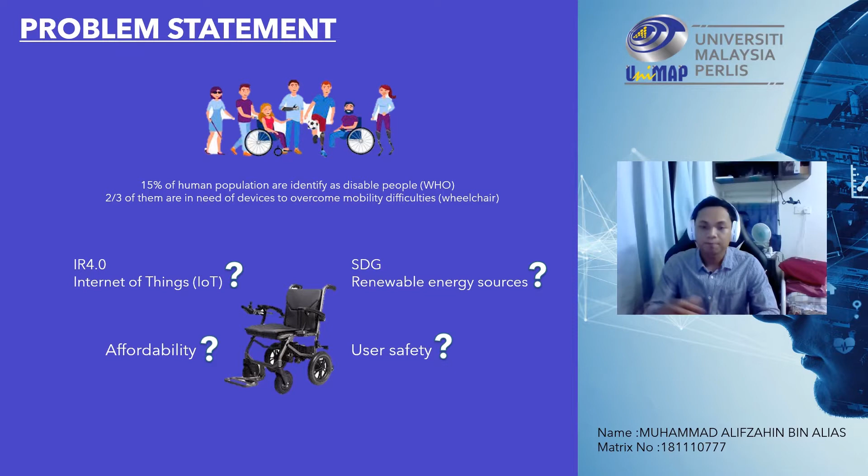We have 4 main objectives in this project. Number 1, to design a new contemporary generation wheelchair in accordance with IR 4.0. Second, to incorporate IoT, Internet of Things components into the wheelchair. Third, to innovate a wheelchair where minimal human effort is needed to move the wheelchair. And last but not least, to infuse renewable energy sources into the wheelchair as a part of sustainable development goals.

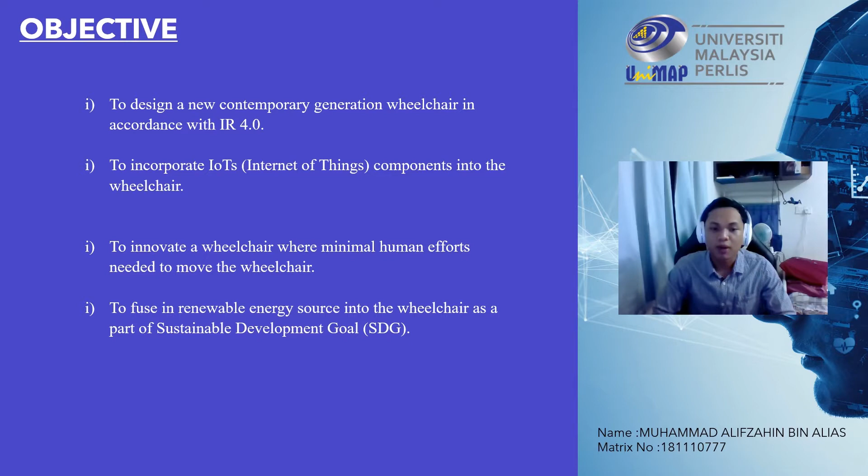Application. We have two sections of this chapter. Firstly, it's design of market survey, and secondly is survey analysis. For the design of market survey, we can conclude 4 steps to get information about the survey. We also ask some determining questions in the front part, about whether you are a person with disability, and if yes, the section will continue to the following part.

Secondly, we ask questions to collect some general basic data regarding the person with disability, such as the equipment they use the most during daily life, and how much time they use the equipment. For the third section, we ask about the problems they face regarding the equipment they use, and problems during usage. The scale is the psychometric scale, where the surveys typically use questions based on this scale. Lastly, the section highlights product opinions and requirements, such as affordability and clean engineering regarding the SDG.

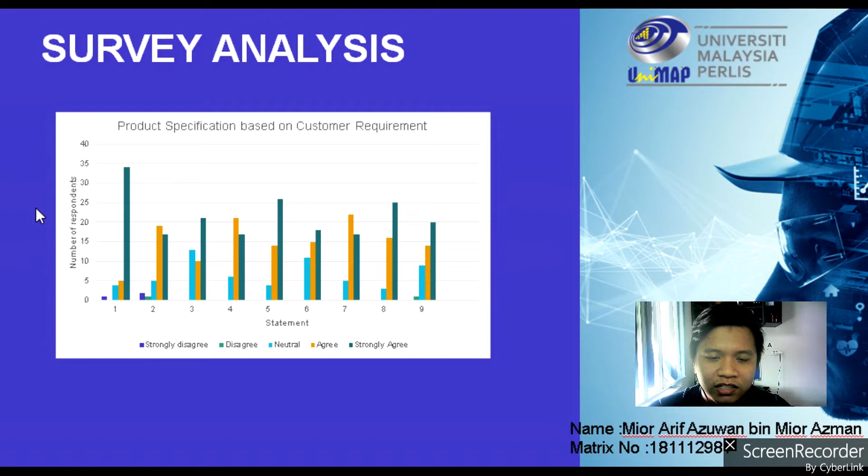For the survey analysis, we can summarize that most respondents want the smart electric wheelchair system which is able to detect any accident occurring and send out an emergency alert to the mobile application. For more information about this survey, you can refer to the report.

Dear panels, I'm Manoj Kiren Anak Lelaki Karthikeyan from RK08 course, and now I'll be talking about the design specification of our wheelchair. First, our wheelchair has an accident detector feature, followed by an emergency button feature. Other than that, our wheelchair is also lightweight and has a high weight capacity. For your information, our wheelchair uses minimum power to move around, and it's also water and dust resistant, which extends the lifespan of the wheelchair.

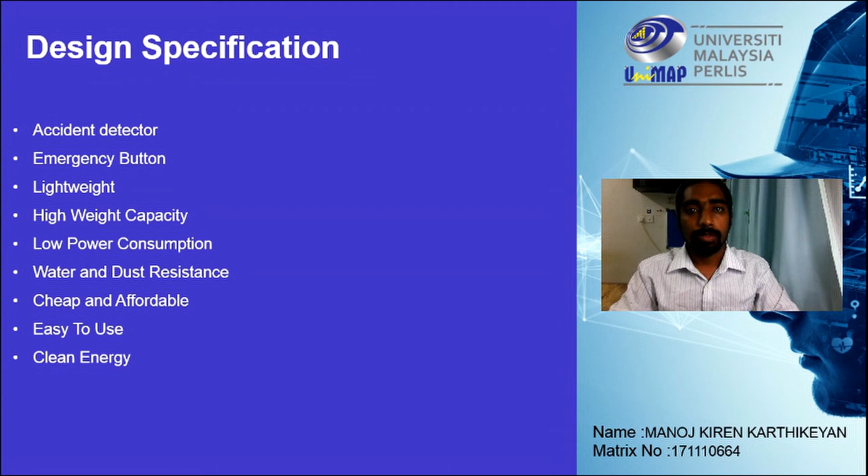This wheelchair is also cheap and affordable, so relevant people will not find it hard to buy. Other than that, it's also easy to use and only uses clean energy. For the specification, our wheelchair will be branded as Smart Electric Wheelchair System, and this wheelchair is also able to alert people in case of any emergencies or accidents. This wheelchair even has a mini backup power sourced from a dynamo, used to power the IoT components. Other than that, it only weighs 8 kilos, and this wheelchair frame is made from aluminum alloy 6061-T6.

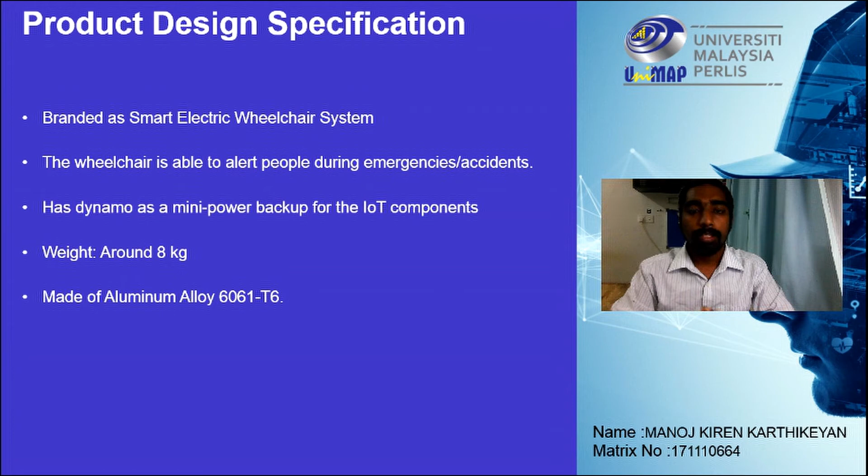Our wheelchair comes with a quick user guide and owner's manual, so relevant people or users can go through it in case they face any difficulties. It can be used both indoor and outdoor.

We are targeting people with disabilities in terms of walking, as well as hospitals, clinics, and health centers. We are thinking of producing about 150 units initially and branding it as SEWS or SUS. We will sell it at a price of 1,500 ringgit, and maintenance will need to be done twice a year, for the battery only.

In terms of warranty, we are providing 24 months warranty for the wheelchair, dynamo, and IoT components, and a 12 month warranty for the battery. We expect our wheelchair to last for 5 years, the battery for about 3 years, the dynamo for 3 years, and our IoT components for 5 years.

In terms of legal requirements, we have followed the regulations set by the Ministry of Environment and Water (KASA) and also the SIRIM Compliance.

In terms of safety and product liability, the only liability we tend to have is the IoT components, where there could be a sudden unexpected failure. For safety, we are equipping our wheelchair with safety belts.

Now getting into the manufacturing part, our wheelchair will be produced in-house, and the parts used for the wheelchair are sourced locally. Concept generation.

Physical decomposition is a top-down method designed to consider the product's physical existence. What we want to focus on in this project is inducing the smart system into the electric wheelchair, because electric wheelchairs are already available in the market.

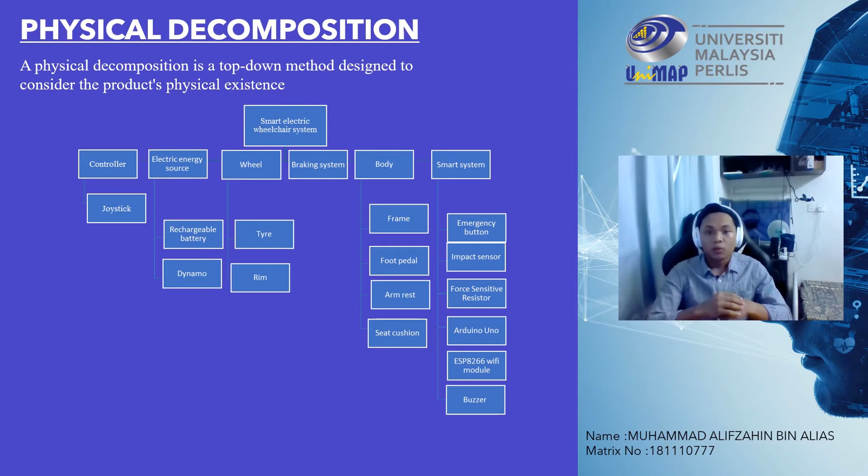We want to induce several components that can bring out the IR 4.0 capacity and the SDG. Looking at the smart system, we put components such as an emergency button, impact sensor, force sensitive resistor, a microcontroller unit or Arduino Uno, ESP8266 Wi-Fi module, and buzzer.

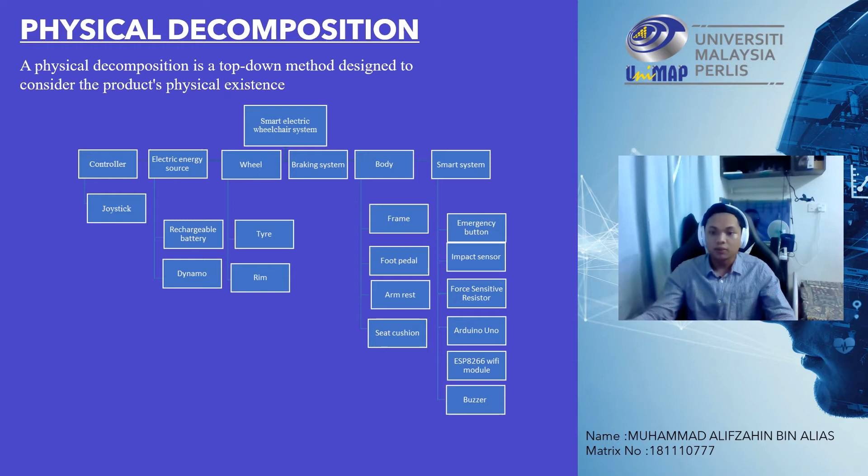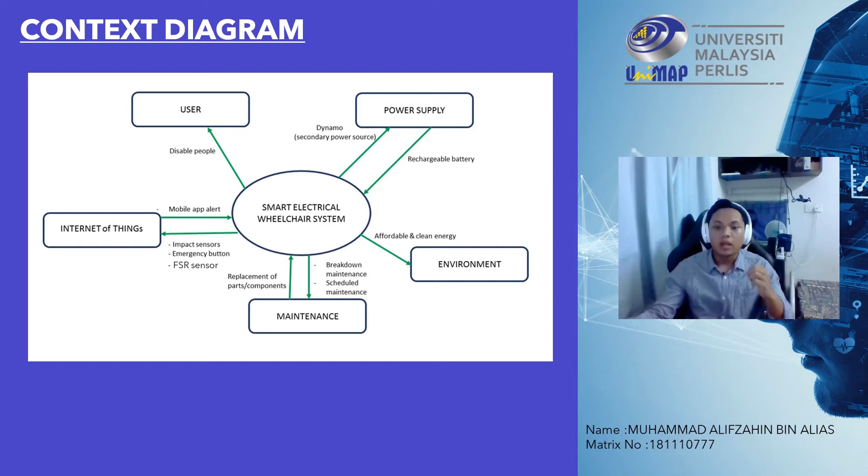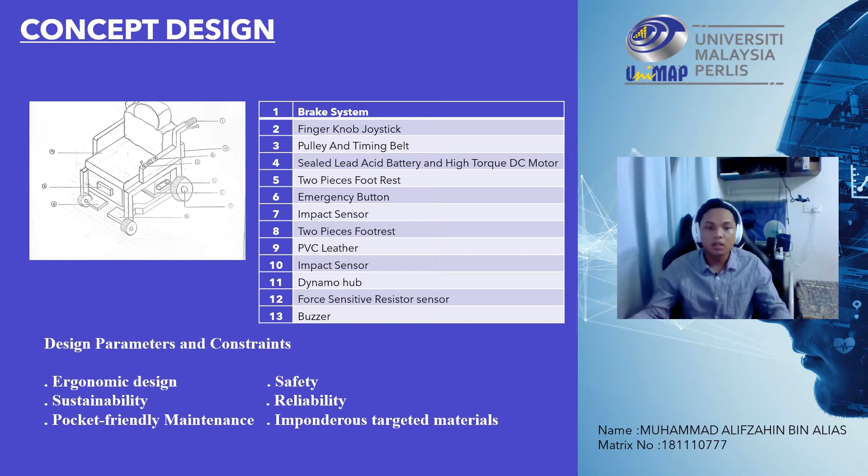We have decision making, concept selection, weighted decision making, preliminary product design specification, and the selected design concept.

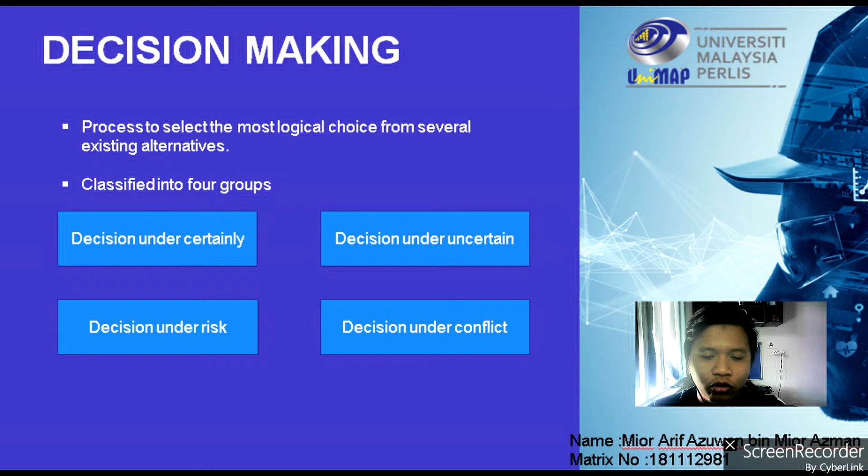Lastly is decision under conflict: the state of nature is replaced by a course of action determined by an opponent who is trying to maximize the objective function.

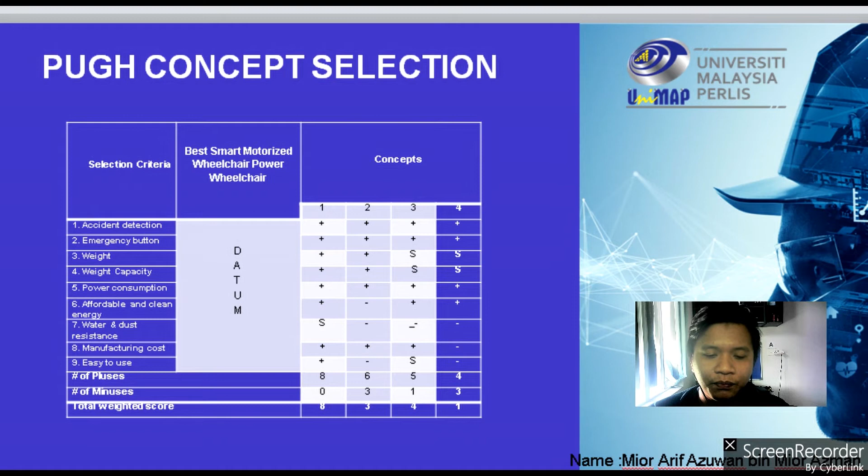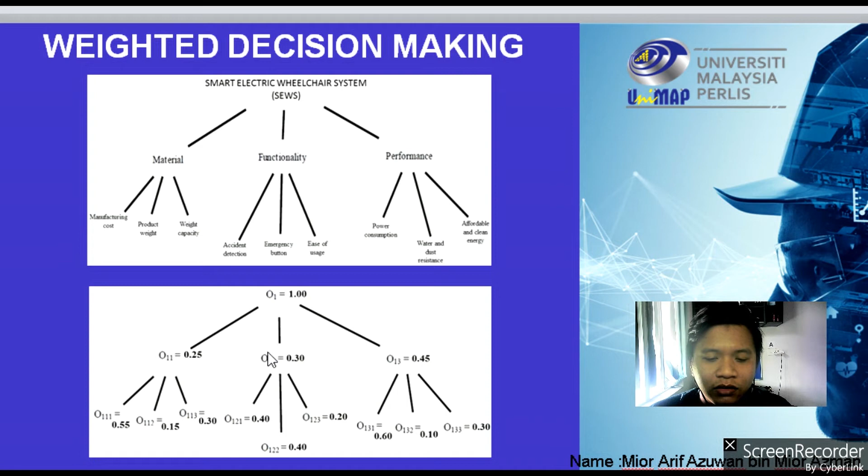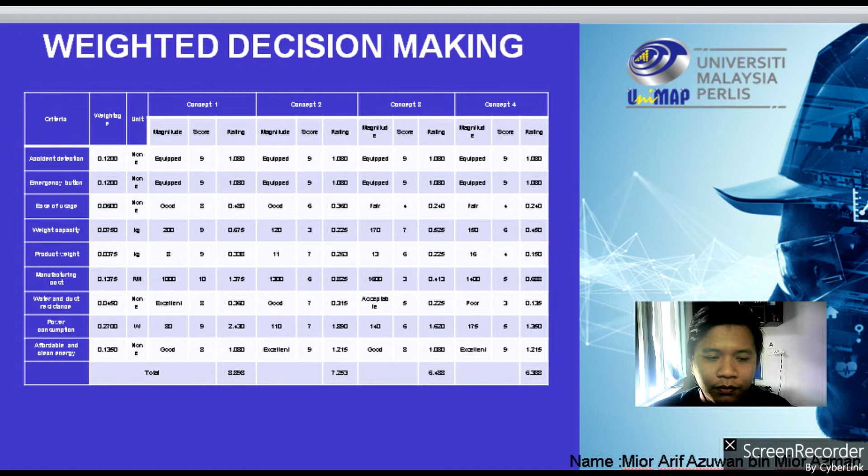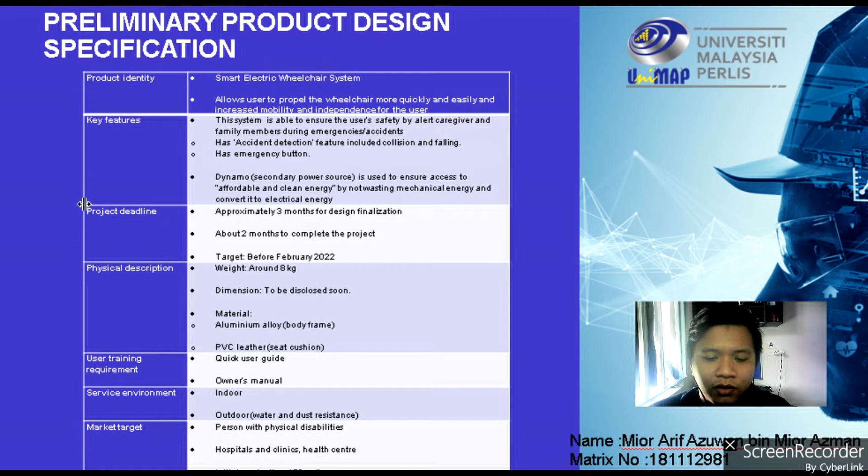For the preliminary product design specification, the table shows the updated product design specification with descriptions based on the change of the product specification. For more details, you can refer to the report for more information.

For the selected design concept, in this project, conceptual design 1 is selected as the final design. It was selected by making a complex decision using the weighted decision matrix and the chosen concept.

It uses a finger knob joystick to control the movement. It also has 2 footrests and a hand rest, used so the user is more convenient in moving, and uses PVC leather because it's more variable and good in water and dust resistance. It also uses a dynamo as backup power in the event of an emergency.

It also includes the smart system, which uses an Arduino Uno, Wi-Fi module, impact sensor, force sensitive resistor sensor, and emergency button, where the impact sensor and force sensitive resistor sensor are used to detect accidents like collision and falling. For more information, you can refer to the report.

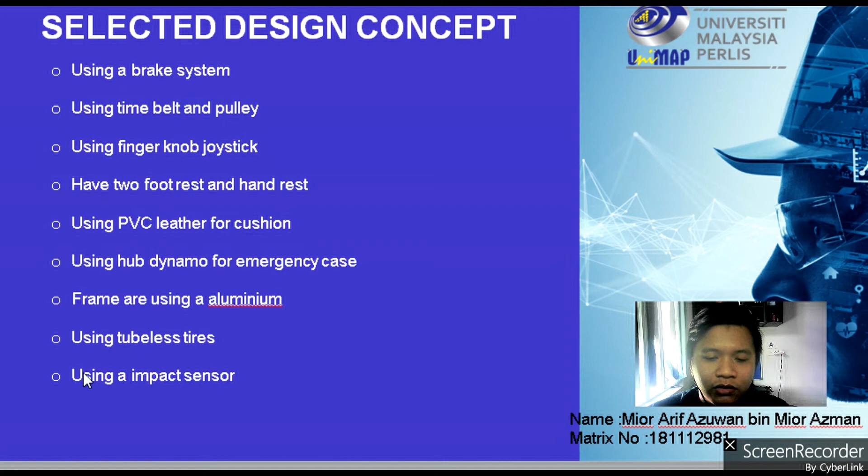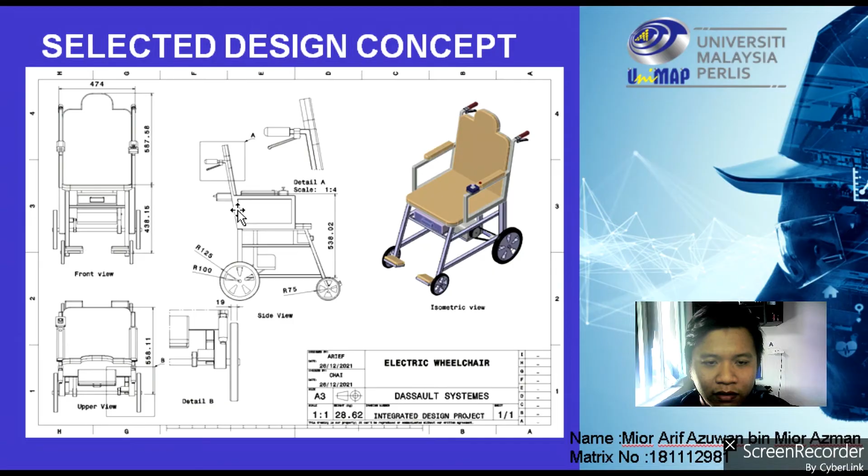Manoj Kiren, and now I'll be talking about chapter 6, which is the embodiment design.

Getting into the key subsystems, our smart electrical wheelchair has 6 parts. First is the controller, which consists of a joystick, followed by the electric energy source, which has the rechargeable battery and also the dynamo, followed by the wheel, which consists of a tire and also the rim.

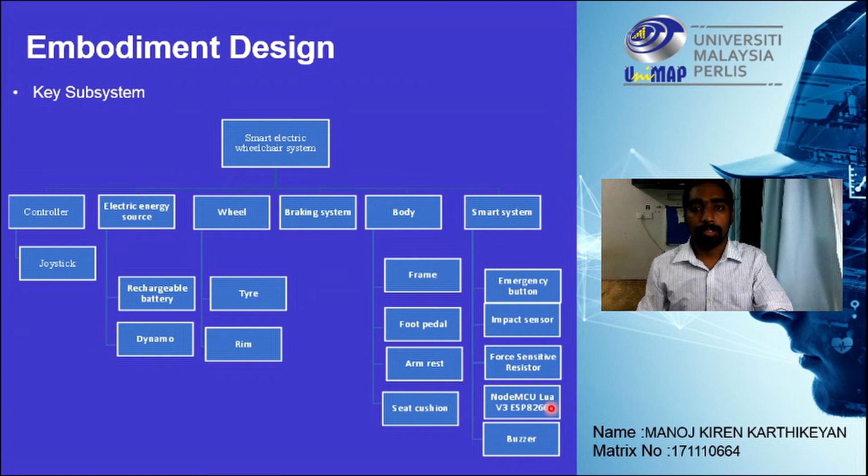Next is the braking system, followed by the body, which has a frame, foot pedal, armrest, and seat cushion. Lastly is the smart system, which is the smart electrical wheelchair's brain, consisting of an emergency button, impact sensor, force sensitive resistor sensor, the NodeMCU Lua V3 ESP8266 module, and lastly the buzzer.

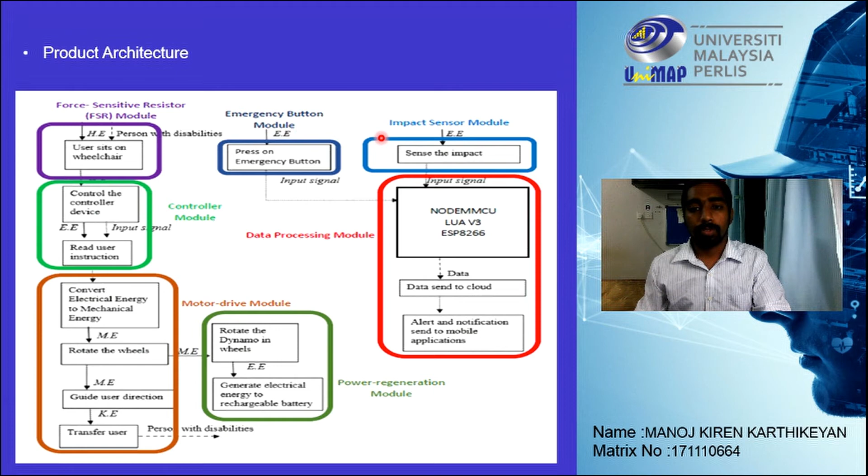Next, getting into our product architecture, our smart electrical wheelchair has 7 types of modules. First is the force sensitive resistor module, followed by the controller module, the motor-drive module, the power regeneration module, the emergency button module, the impact sensor module, and lastly the data processing module.

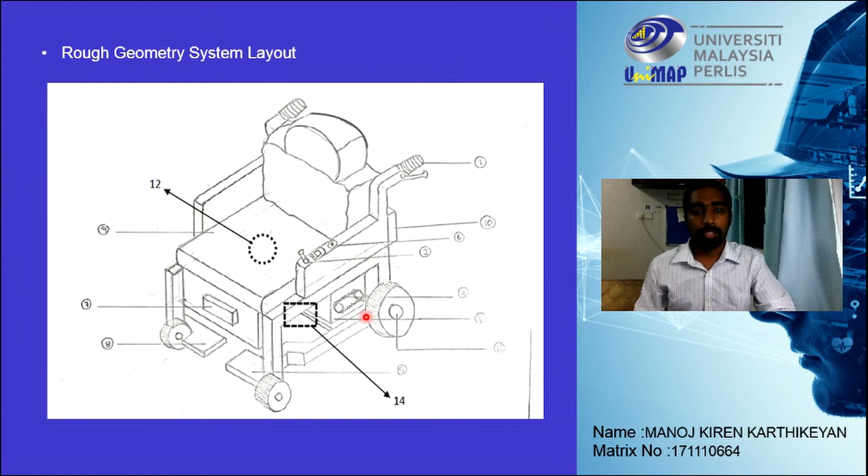And then we also have the buzzer, and we also have this NodeMCU Lua V3 ESP8266 module over here. That's all from us. Thank you.

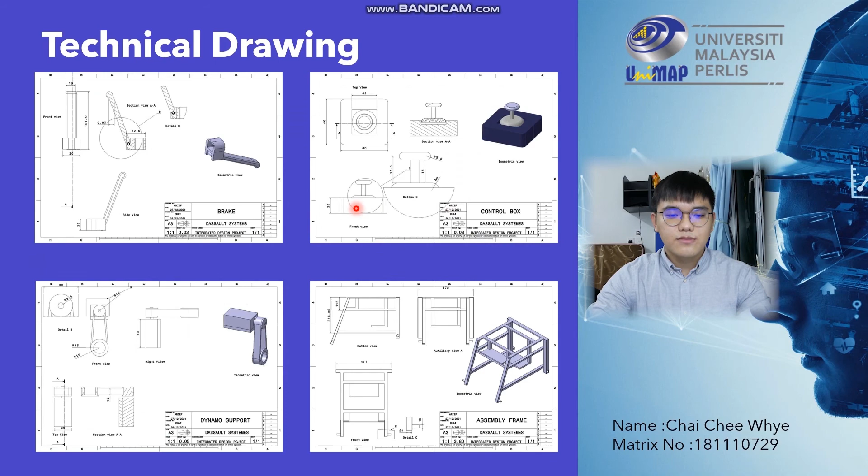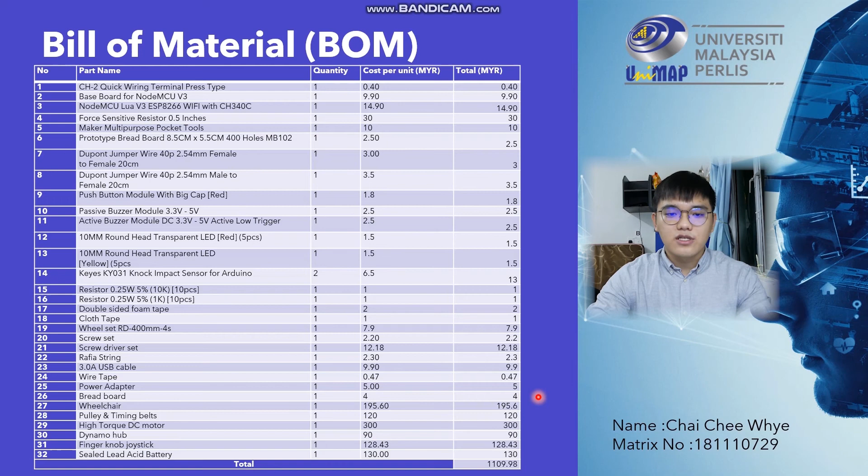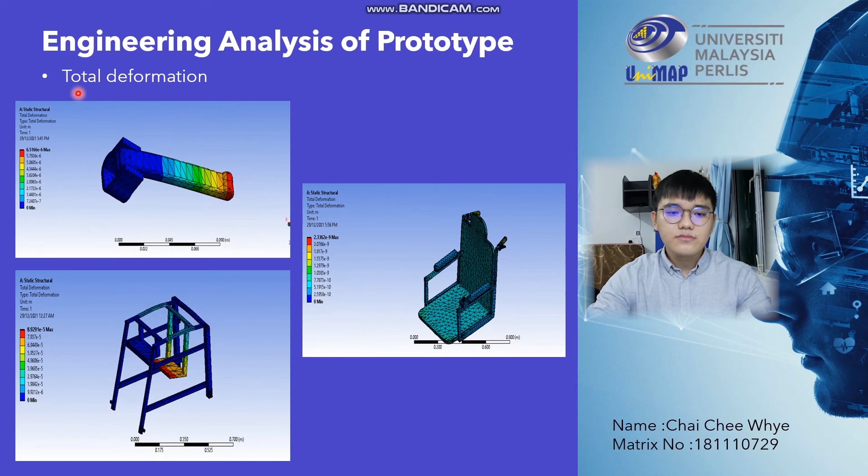The smart electric wheelchair designed using CATIA is applied to the ANSYS software for engineering analysis of the prototype, including total deformation, total equivalent stress, and safety factor for the wheelchair when human load is applied. The figures below show the analysis for total equivalent stress, total deformation, and safety factor.

Next, the proof of concept prototype includes the following: design for manufacture, design for assembly, and design for environment. The doctor may look for details in the full reports.

Fabrication process is the process of making something from scratch rather than assembling something. The fabrication process for the prototype started with tires, wheelchair, electronic parts, phone application, and ended with assembly of the prototype.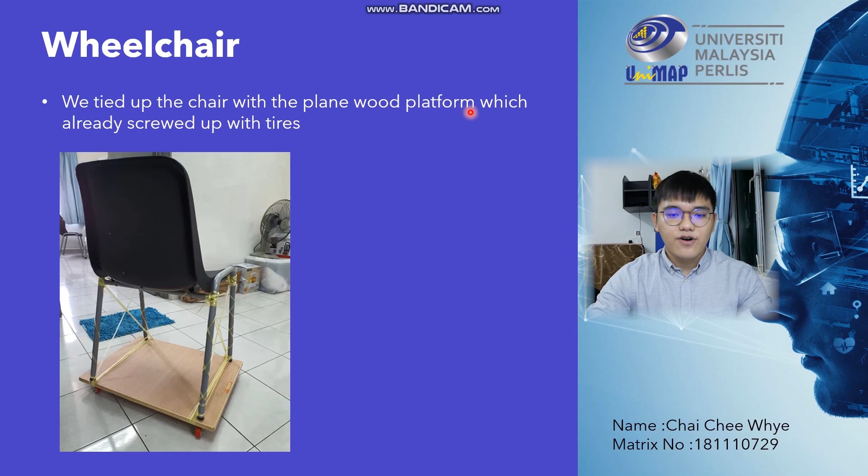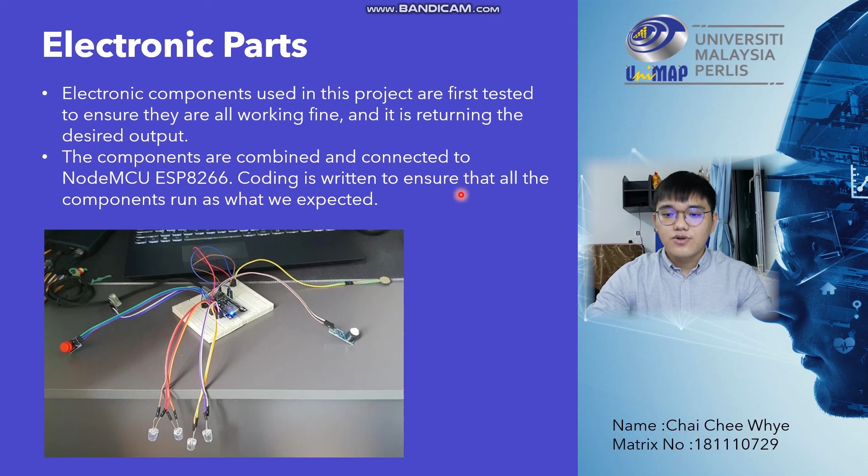For the electronic parts, all electronic components used in this project are first tested to ensure they are all working fine and returning the desired output. The components are combined and connected to the NodeMCU, and the coding is written to ensure that all the components run as expected.

The Blynk phone application is used to show the alert notification sent from the wheelchair and passenger. The coding to communicate with Blynk is added into the NodeMCU. There are 3 different alert notifications which are shown in the figure below.

Warning, impact detected. Warning, impact detected, passenger thrown off the seat. And the last one is warning, emergency button is pressed.

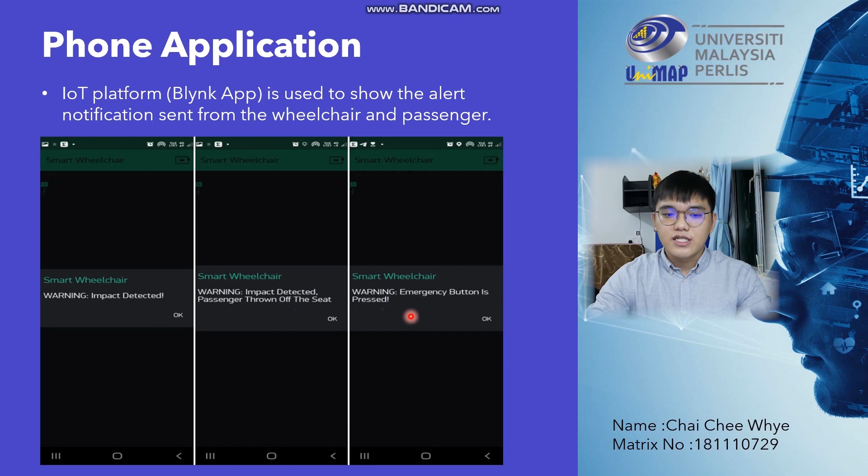For the economic analysis of the product, the exact expenses and predicted profit that could be obtained are shown in the following calculations. The overall making cost is 1,109 ringgit and 98 cents. The net sales is 1,500 ringgit.

The gross profit is 390 ringgit and 2 cents. So the gross profit margin is 35.14%.

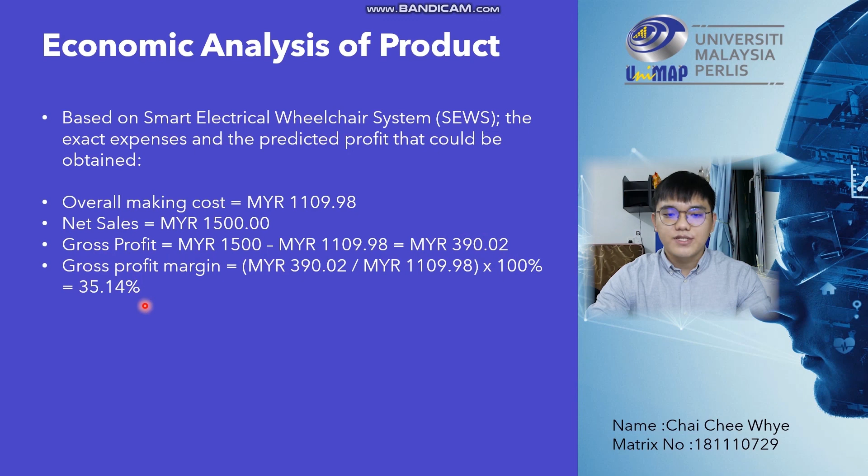Next, the slide shown is the income statement per 150 products. The net profit is 57,301 ringgit, and the profit margin ratio is 25.47%.

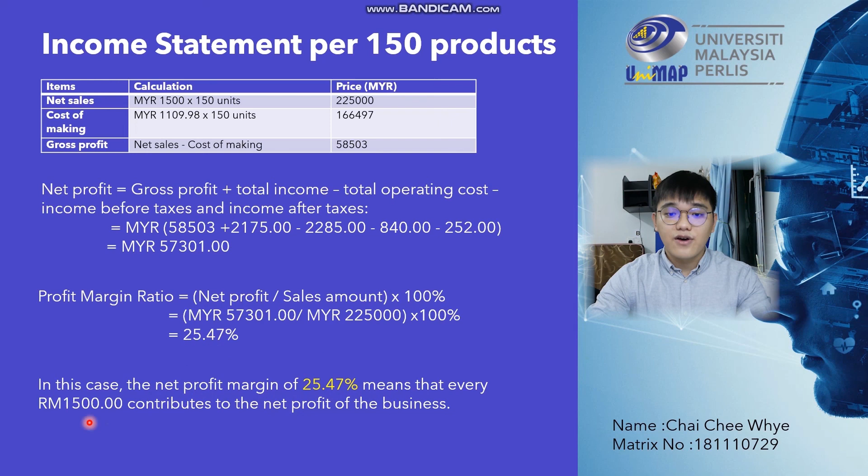In this case, the net profit margin is 25.47%, meaning that every 1,500 ringgit contributes to the net profit of the business. Next, we proceed to the discussion and conclusion.

In the discussion part, the cost of making, the material used, and the manufacturing process are justified based on the concept that was chosen in this section.

One of the essential steps in product design is the process of choosing the suitable material. Aluminium alloy 6061 T6 material is chosen as the main material for making this wheelchair. It was chosen due to its mechanical properties such as yield strength and density, enabling lightweight and durability.

This material can be recycled in the future in the form of remelting and crushing into small particles for other applications.

For manufacturing, one of the processes involved is the harness, where the wire should not have any contact with the aluminum frame of the wheelchair. While for the cost, the total cost of the items, components, and parts utilized sums up to a total of 1,109 ringgit and 98 cents only.

As a result, the wheelchair will be affordable to the targeted market.

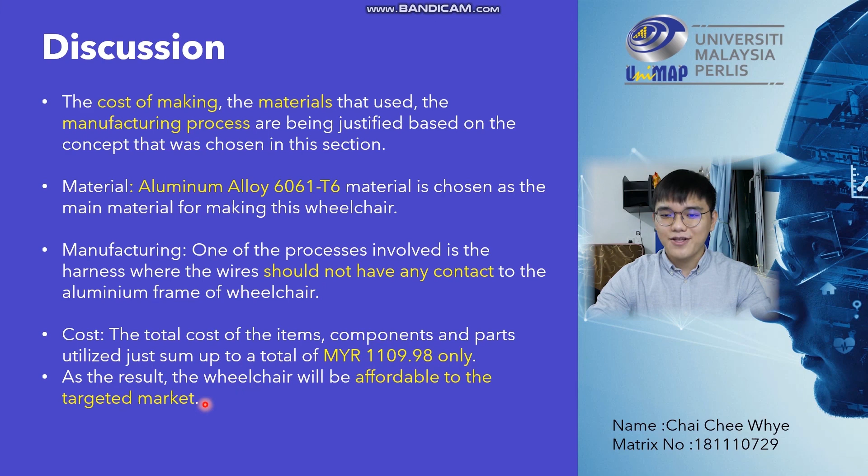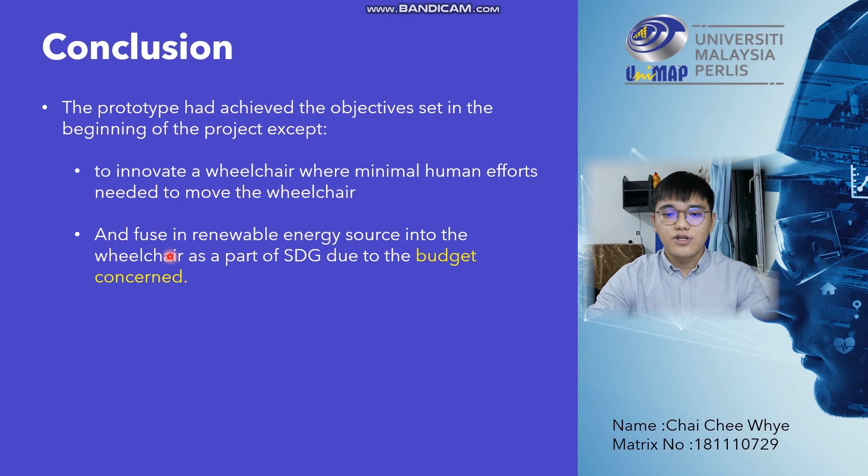To conclude the project for the smart electric wheelchair system, the prototype that had been developed is able to achieve the objectives set in the beginning of the project, except to innovate a wheelchair that needs minimum human effort to move and to fuse a renewable energy source into the wheelchair as part of the sustainable development goal, due to budget concerns.

The prototype can detect impact and falling of the wheelchair passenger and send out an alert notification to the caregiver or family member through IoT to the phone application.

The wheelchair can also send out the alert notification by pressing the emergency button installed on the armrest of the wheelchair. The wheelchair will alert people nearby when the situations stated above happen by triggering the LED and buzzer on the wheelchair and sending out sight and sound signals.